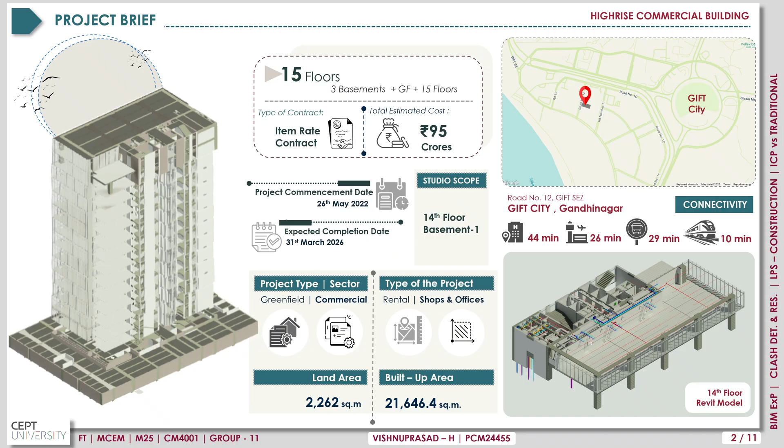It is a greenfield commercial development with shops and office spaces. The site covers 2,262 square meters with a total built-up area of 21,646.4 square meters and consists of 3 basements, ground floor and 15 floors. It follows an item rate contract with a total estimated cost of 95 crores. The project commenced on 26th May 2022 and is expected to be completed by 31st March 2026. The scope for studio is 14th floor and basement first floor.

The BIM execution plan was created after the EIR. The process begins at the inception stage. Here, the client appoints the PMC and initiates the appointment of all required consultants. The PMC then recommends the full consultant team, and once the team is finalized, the BIM execution plan is prepared. In the concept stage, the architectural LOD 100 model is developed and reviewed. Project coordinates and survey data are finalized by architect. Once approved, the project moves into schematic design.

At schematic design, all disciplines, architecture, structure, and MEPF develop their LOD 200 and LOD 300 models. These models are integrated, clash checked, and coordinated until the design is constructible and error-free. In the detailed design stage, models advance to LOD 400. Here, architecture and structure is done for LOD 400 and other MEPF services for LOD 300. Continuous approval cycles, consultant reviews, and clash resolutions ensure a fully coordinated fabrication-ready model.

During the execution stage, the approved LOD 400 model is sent to the Gift City proof checking consultant. After final approval, the GFC model is released. This stage also includes 4D scheduling and 5D cost estimation to support construction planning. Finally, in the operation stage, the record model is prepared and handed over to the client for facility management. This workflow ensures a structured, coordinated, and efficient BIM process from concept to handover.

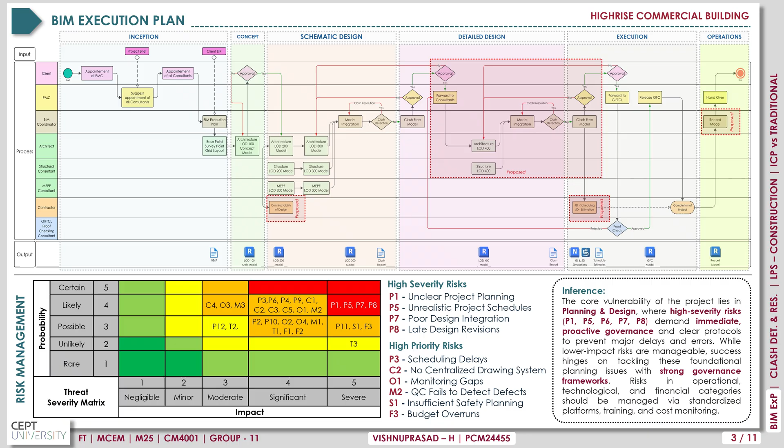Before beginning clash detection, a quality check of models was completed to ensure elements were modeled correctly. Visual clashes detected were resolved. In iteration 1, clash detection was carried out using the LOD 300 architectural and structural models in Navisworks. The architectural to structural review recorded 209 clashes, largely involving hard clashes where structural slabs conflicted with architectural walls. These clashes were then grouped by type, such as wall to wall, wall to slab, floor to column, and door to shear wall, to clearly identify their root causes.

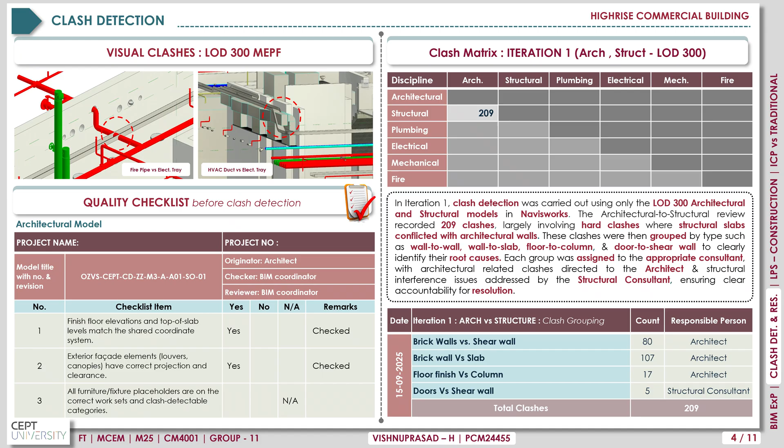Each group was assigned to the appropriate consultant, with architecture related clashes directed to the architect and structural interference issues addressed by the structural consultant, ensuring clear accountability for resolution. In iteration 2, all major clashes were resolved with only one unresolved clash remaining due to a software glitch. The clash grouping shown here reflects the structural versus plumbing LOD 300 clash after iteration 3. By the final iteration 4, almost all clashes were reduced to zero. Only a few conflicts persisted, mainly between architectural walls and MEPF elements such as switchboards and concealed plumbing lines. These have been minimized as much as possible but will require further detailed level of modeling for complete resolution.

Overall, the BIM clash detection process revealed significant on-site coordination failures and highlighted the limitations of traditional 2D planning. It enabled early identification and resolution of design conflicts, improved clarity on space and service routing constraints, strengthened interdisciplinary collaboration, and ultimately delivered clash-free federated models that support smoother quantity takeoff for BOQ preparation and more efficient project scheduling.

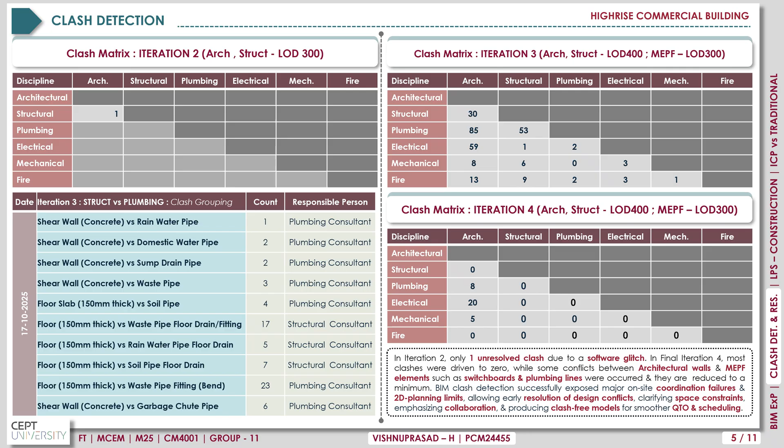This slide represents a few representative clashes identified from the Navisworks clash detection report during iteration 1 and 3. In iteration 1, under architectural versus structural coordination, several modeling errors were detected. Clash 13 showed a structural beam intersecting a masonry wall, which requires adjusting the beam height as per the finished floor level on approved drawings. Clash 15 involved the architectural floor intersecting the structural beam, and this can be resolved by modifying the floor finish so that it properly connects without interference. Clash 21 showed an architectural wall intersecting the structural wall, requiring correction in wall length. All these issues were assigned to the respective consultants for action.

In iteration 3, the report identified clashes between structural elements and plumbing services. Clash 21 showed a shear wall interfering with the domestic water supply line, and Clash 25 showed a similar clash between the shear wall and a rainwater pipe. In both cases, the solution is to provide a cutout or sleeve opening in the wall to allow the service lines to pass through safely. These were assigned to the structural consultant and remain open until modeling adjustments are completed. Overall, this slide demonstrates how Navisworks helped catch critical clashes early, supported clear consultant responsibilities, and improved coordination between architecture, structure, and services.

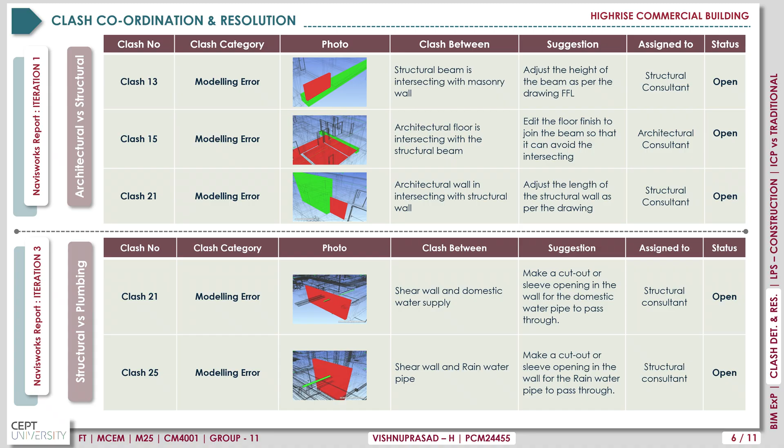During site observation, several on-site clashes were identified that led to rework, such as core cutting in beams for sleeves, cutting walls after plastering, incorrect sprinkler alignment, improper deck clearances, and late corrections in staircase slab openings.

This table shows the total rework cost incurred on the project due to design and coordination gaps. A major portion of the cost came from core cutting in RCC because service routes were not planned in advance, contributing 7,20,000 rupees on its own.

Additional rework included wall cutting after plastering, staircase slab extension, and corrections in deck openings, all stemming from late design decisions. Further expenses occurred from fire sprinkler rearrangement and adding exhaust fans, which resulted from design and coordination faults. Altogether, these reworks led to an additional cost of 10.92 lakhs.

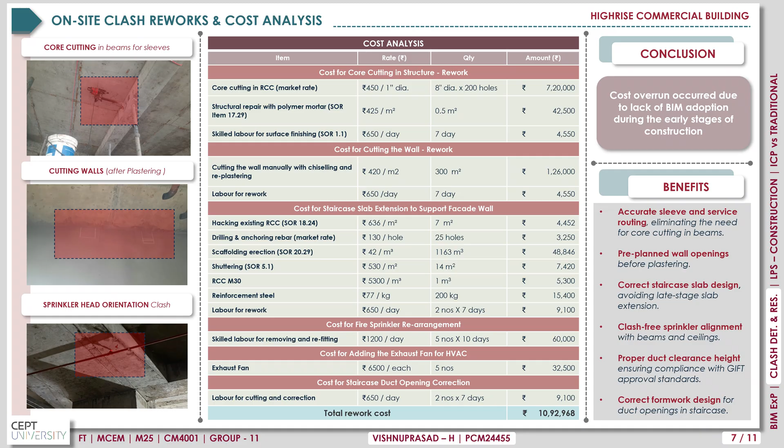This clearly demonstrates how the lack of detailed early modeling and proper coordination can create substantial financial impact, most of which could have been avoided through timely BIM and Lean based planning.

The Lean tool Last Planner System was implemented for execution of construction for 2 weeks. On 3rd November 2025, a 2-week look-ahead plan was prepared for the floors under execution. The activities on the upper terrace floor consisting of slab casting, 15th and 14th floor consisting of lift wall rendering, 11th floor consisting of AAC block masonry work, and basement first floor consisting of fire sprinkler installation were tracked, to analyze the activity sequencing, resource availability, and planning constraints.

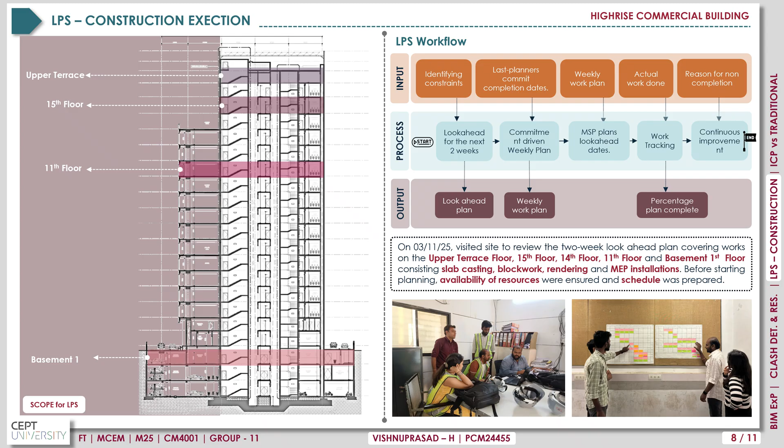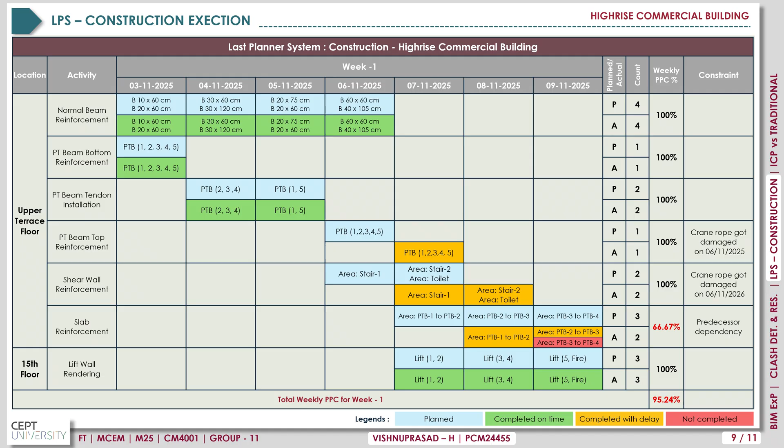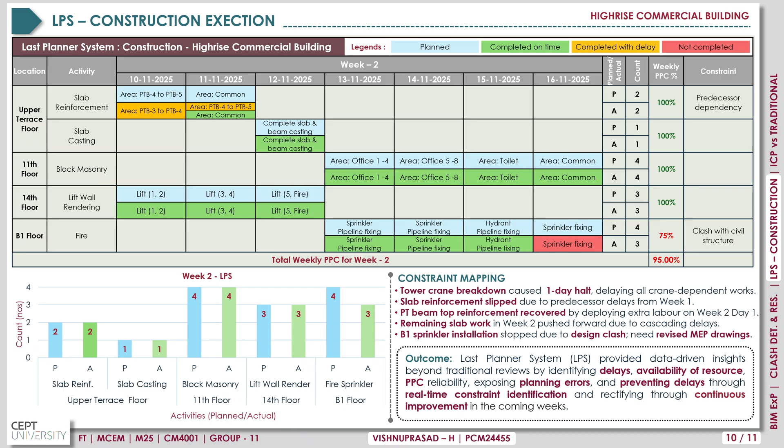The LPS provided data-driven insights beyond traditional reviews by identifying delays, availability of resources, PPC reliability, exposing planning errors, and preventing delays through real-time constraint identification and rectifying through continuous improvement in the coming weeks.

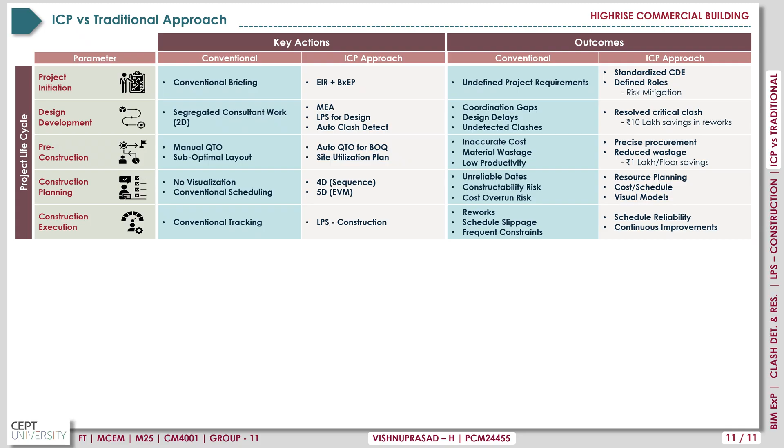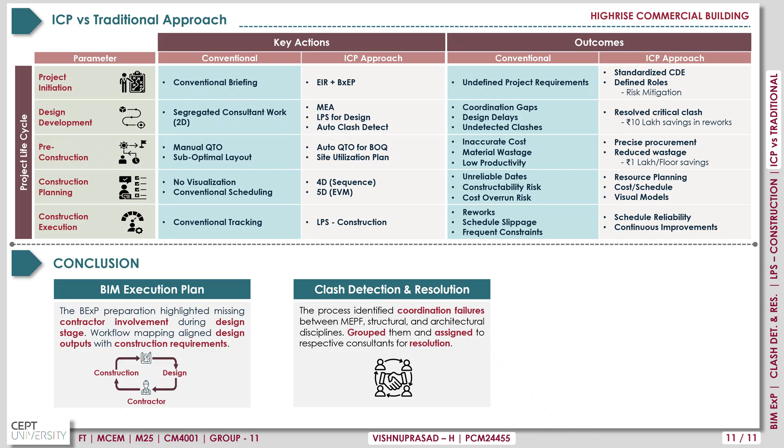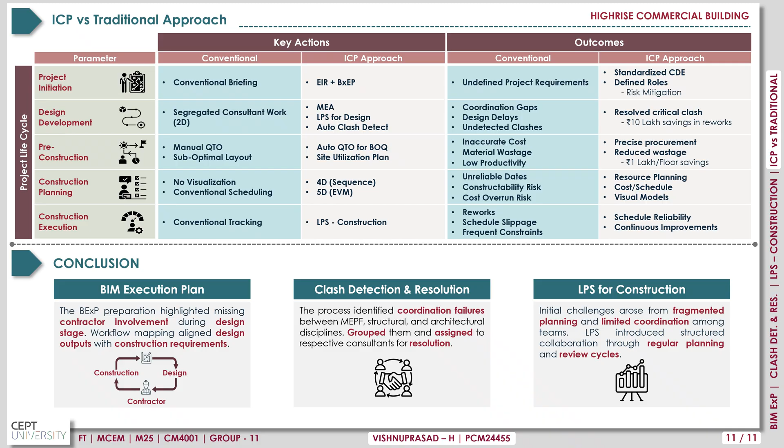Coming to the conclusion, the BIM execution plan preparation highlighted missing contractor involvement during the design stage. Workflow mapping aligned design outputs with construction requirements. In clash detection and resolution, the process identified coordination failures between MEPF, structural and architectural disciplines, grouped them and assigned them to respective consultants for resolution. In LPS for construction, initially challenges arose from fragmented planning and limited coordination among teams. The LPS introduced structured collaboration through regular planning and review cycles.